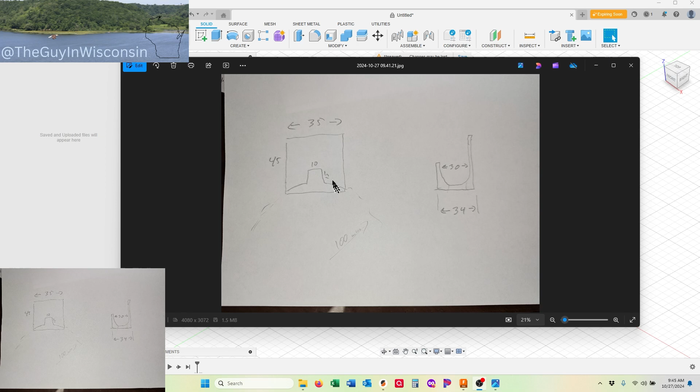This little tab here that's going to stick up and support it, I might have to adjust a little bit because I do have to have the 30 millimeters from the top, in order to accommodate fitting that tube into the area we're going to put it.

So this is going to be a little bit new for me. I'm going to start out by creating an arc that this is going to follow, and then build it up from there. There's going to be a bit of figuring it out on the fly, which I've done on other videos with fair success. So we're going to see what happens. I'm going to have this image down here in the lower left corner for you to follow along, and let's get started.

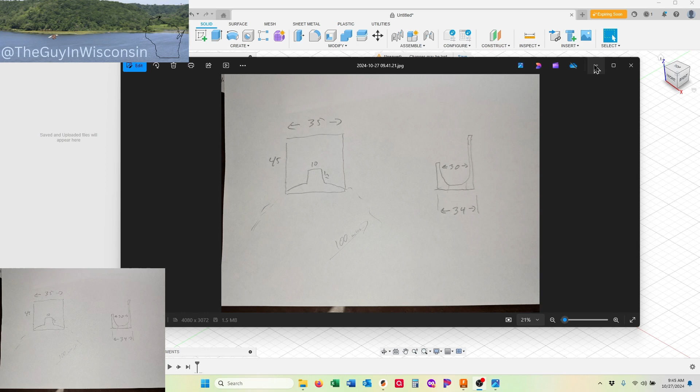So we're going to start out with the drawing. I'm going to do it from the front. I'm going to pop this up. We've got our front side drawing right here.

Now we're going to put a circle to start that initial arc that I was talking about. It's a 100 millimeter radius, so it's going to be a 200 millimeter diameter, which is what this is going to draw out as.

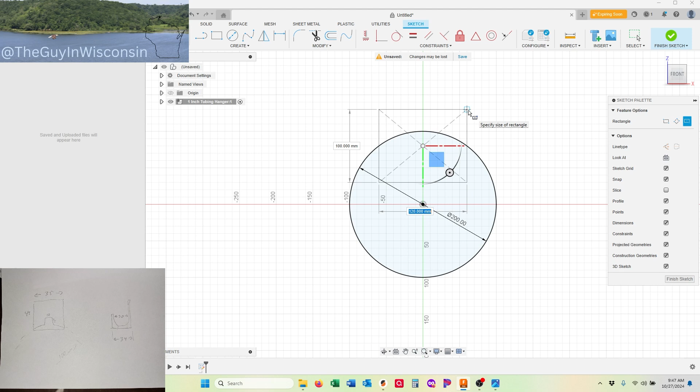Then if we look at the drawing, we see that we want it to be 35 wide by 45 tall, and we want it catching just this top edge here. So I'm just going to roughly place this in here, and I'm going to do a center rectangle so that I stay on my axis point. So we are going to do the width of 35, height of 45.

And to place this, we're going to have to figure it out as we go. So we're going to bring it in here, and we're going to grab a distance from center to this point here. Like I said, we're going to mess around with this a little bit.

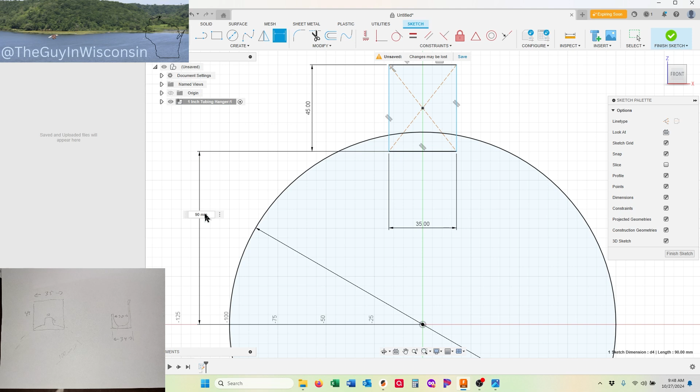So we're going to push it out. We know we want it to be less than 100 because that's the radius. So we're going to start it out at 90, and that's going to get us fairly decent, but that's still going to leave a pretty strong edge there. So we're going to try 95. That's real close to what I want. I'm probably going to have to come back and tweak that again in a little bit.

So that gives us that dimension there. And in order to lock this in here, this is one I struggle with. But we want this to be collinear on this line. So I'm going to add a line in here. It'll be a construction line. It's just going to come up the top here.

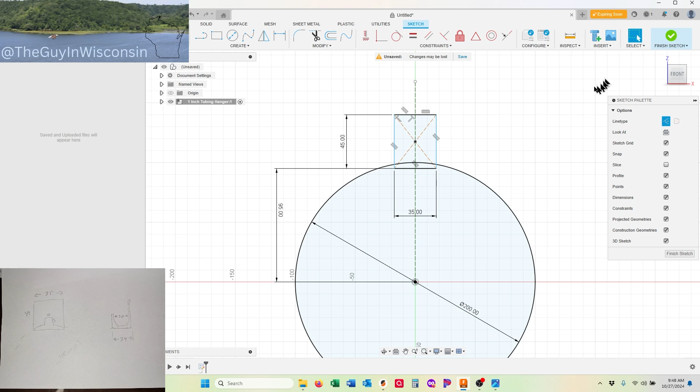And that's all we needed there. Then I should be able to place this dot to be coincident to that line. So I'm going to set this dot to be coincident with that line. And now everything turned black, so we should be good. So it's going to stay centered there for us.

Now, depth-wise, if we look at our drawing, it's going to have a total of a 34 depth, and I want it centered on this plane. So I'm going to extrude this both directions, 17, so we get the total of 34. So we're going to finish this sketch. We'll be coming back to it to make some tweaks.

And I'm going to stretch all this out. We are going to go... oh, it is a distance. And we are going to do symmetric. The extent, the total distance, is going to be measured on one side. We could do total, but we're going to do one side because it's an easy number to figure out.

So we're doing 17. And to get a view of that, we're going to take a look. That's pushing it both directions by 17. So we're going to say okay to that.

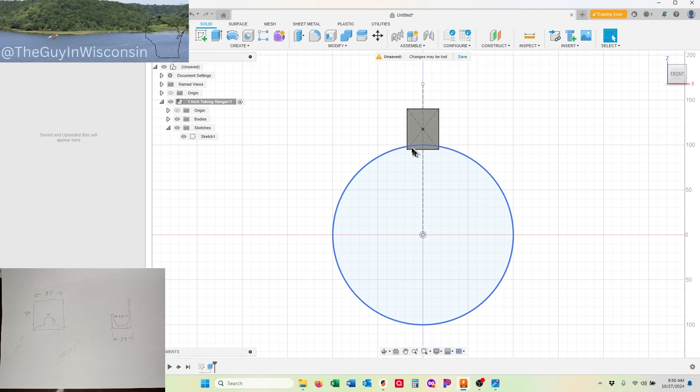Now I've got my first body out there. I'm going to get that drawing back just so we can kind of see how it built it in there, exactly what we wanted it to do. And I can see right now I probably want this space here to be smaller, because remember, I'm going to deal with that overall height.

This will be the bottom part of the circular support, the curved support that's going to be in there. So if I come back to my drawing here, it's going to be pretty easy to switch this out. Now if I just wanted 2 millimeters difference, I'm going to push that up to 97.

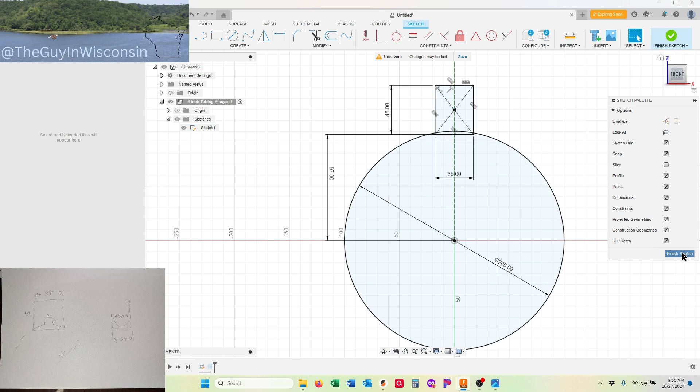Then we can see what that looks like, and I do like the looks of that. If I measure it out, I'm going to come from this point here to that point there. And yeah, that doesn't give me a good drawing point. I'm sorry, it is tough to get these to inspect.

If I pushed it a lot, I'd certainly be able to get through that.

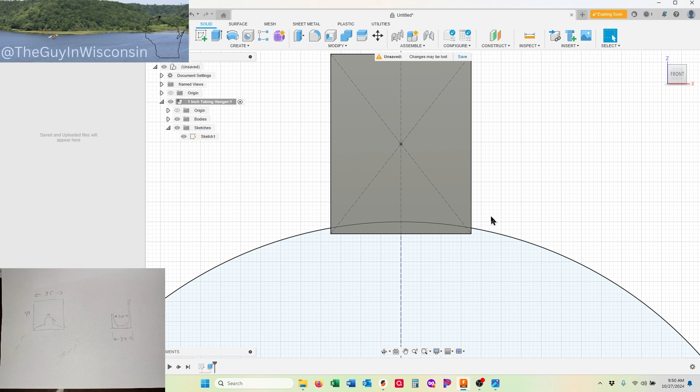All right, so now at this point, what I want to do is work on the center line from the other side, so I can create a profile that's going to allow me to draw or to cut out that circular arc pattern in there.

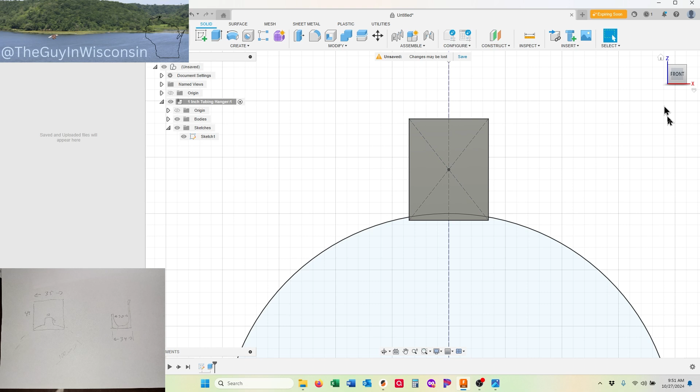So we are going to add, I'm going to get rid of this drawing just to clean it up a little bit. We're going to add a construction plane, and it's going to be at that axis, and we are not going to push it out. We want it to be centered right there, right? And we're going to pull it right through our drawing.

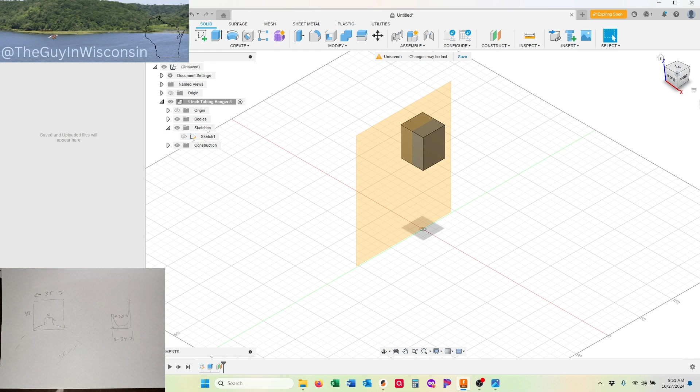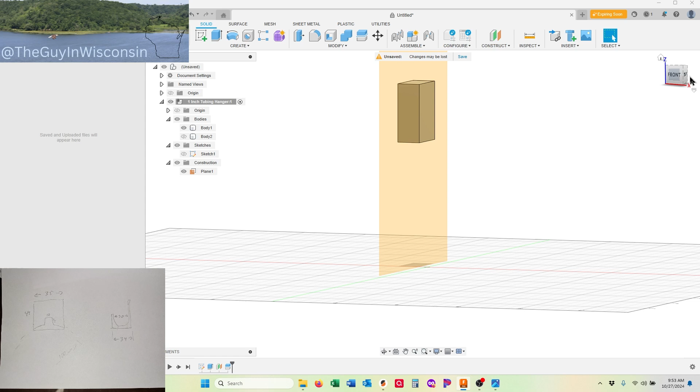And then we're going to split these bodies. We're going to take this body and split it at this plane. And now we've got two bodies here. We're going to get rid of the one on the right just so we can get in here and view it. So now we're going to create that drawing.

It's going to be on the face of this piece here, and now it should let us get away with it. So I'm going to put my circle on here. We want it on that center line. Again, it's going to be the 30.

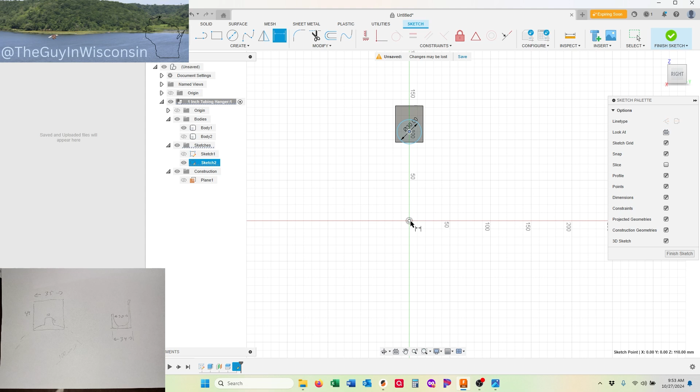And now I should be able to get a distance between these 2 points. Now it'll pop up for me. That's what I was after.

So we know that we are going to be approximately, well, we got the 100 millimeters, and then we wanted it to be half of that 30 millimeter circle, which would be 15. So we want that 115 up. We put that in here.

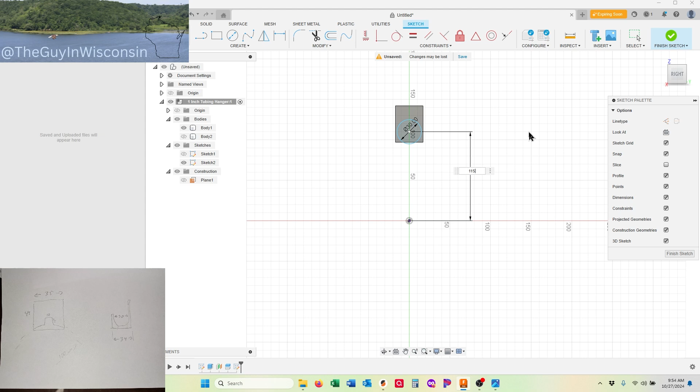And now we've got a circle in here, and we can see how it's going to create the circular pattern. And what we're going to do here is rotate it through both structures.

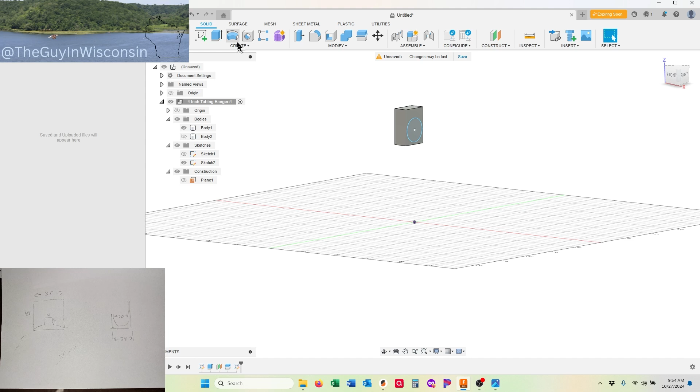So we're going to do a revolve. We're going to revolve this, and the axis is going to be, let's get our origin here, the axis is going to be our y-axis. Oh, come on, Mr. Y-axis, show up for me, please.

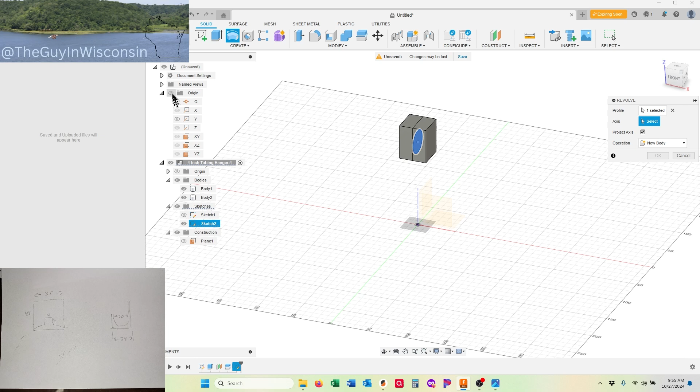And now it knows that we're going to do something with it, so it did a cut. So if we take a peek here, now we've got a circular angled pattern around that radius point that I created.

So now we've got a nice curved feature, and I'm going to be able to rejoin these two halves now. So that's what I'm going to do with this next point, is join the two halves.

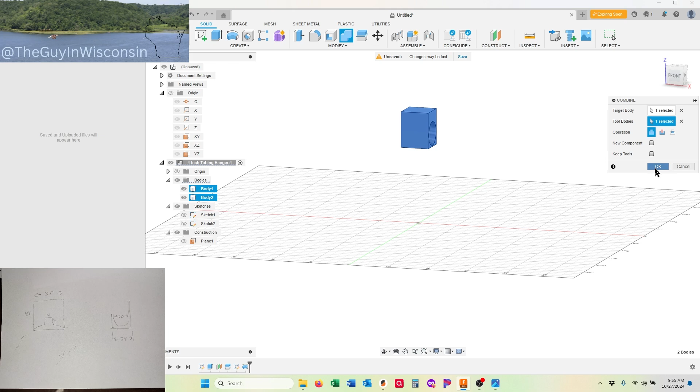So I'm going to combine this body and that body. Now we're back to one body again with that curved opening.

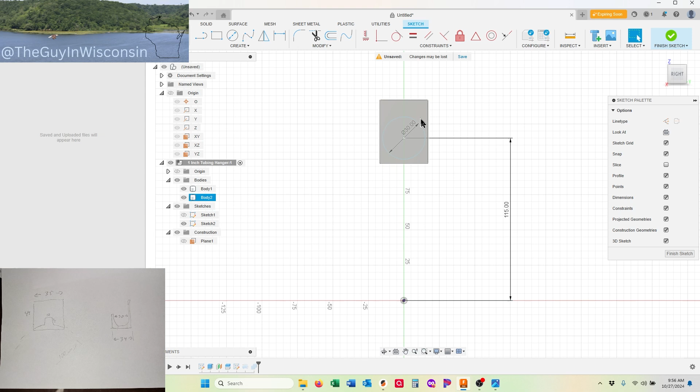We're going to grab, oh, you know what, I want to go back before that revolve and get back into this image here. Grab this. And what I want to do here is create tangents to that circle going straight up. So I have to get rid of one of these bodies so I can get back to my drawing. And put a line straight up here, right up to the top, and another one straight up here, right up to the top.

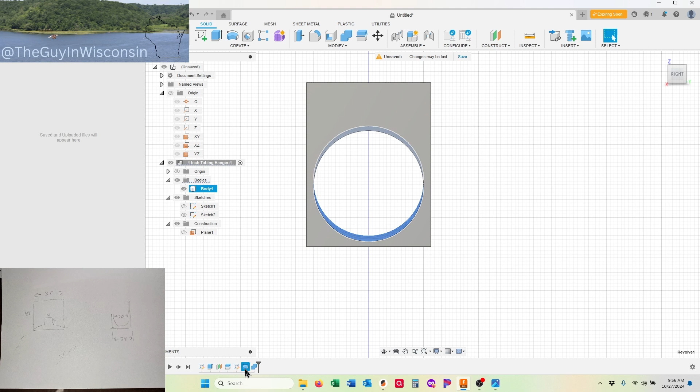And also, I know I don't want to go more than halfway high on this outer edge. So that's going to come out to the side here. And finish that sketch. Now nothing changed because on the revolve I didn't change what's happening on the revolve.

So on the revolve we are going to include this and this in the revolve. So that part's working fine, and I got to get it to accept that I want this portion in there as well.

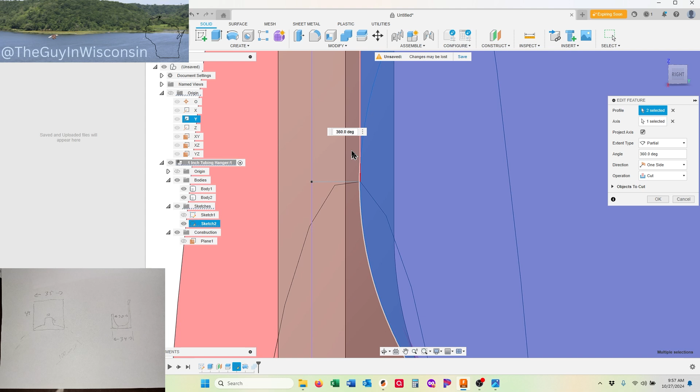Got the same axes, and why is it not allowing me to? I'm going to allow this much. Now as we can see, oh, it didn't go all the way to the top for some reason.

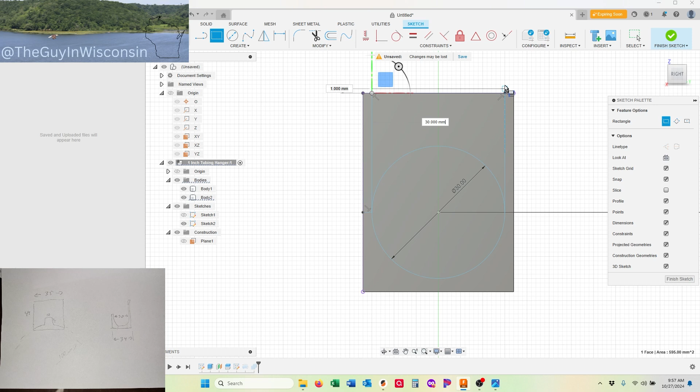Oh, that's because my revolve, I got it. So this is teaching me lessons here. Because this portion only went up this high and it's on an arc, it wasn't going to do the entire thing. So we're going to add a little bit more here just so we can include that.

And that's why it wasn't able to do all of it, because it didn't have a complete body to work with. So now we're going to include this, and I'm going to get rid of the first body so I can include this.

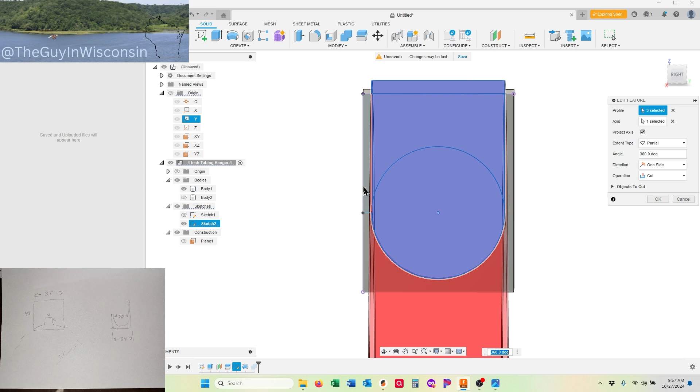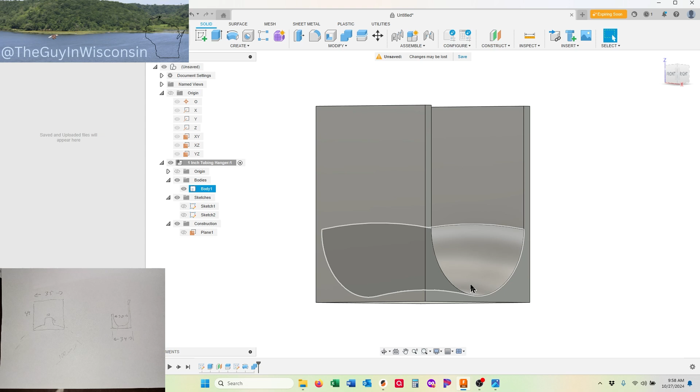Still not letting it, so I'm missing something here why it's not letting me get rid of this part here. But if I go back and take a peek now, we are getting the shape we want. We got the curve here, we can see it show up nice. We got that arc underneath there that's going to support the tubing on the curve, and we got our back piece.

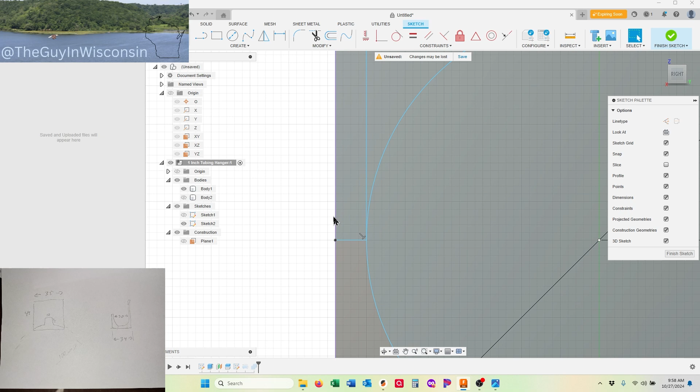If I come back and take a look at my drawing, I must have goofed up something there and not gotten it where it's supposed to be. So I'm going to get rid of the first half of the body again so I can see what my drawing did. Well, this does allow me to select it, so this is an area I should be able to select. It wasn't letting me do that on the revolve, so something with the revolve was saying no, we're not going to do this.

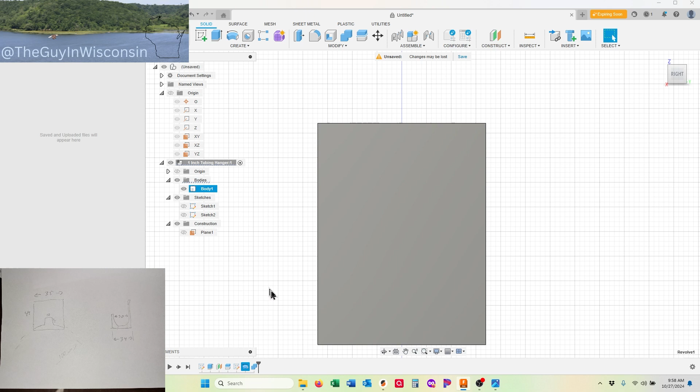I think I can be okay with that if that's going to be the case, but I'm going to try one more time. Now that we know that can show up, I'm going to come back to the revolve and see if I can get it to pull up. Now it lets me do it. It must have just had a glitch - it didn't like what was going on.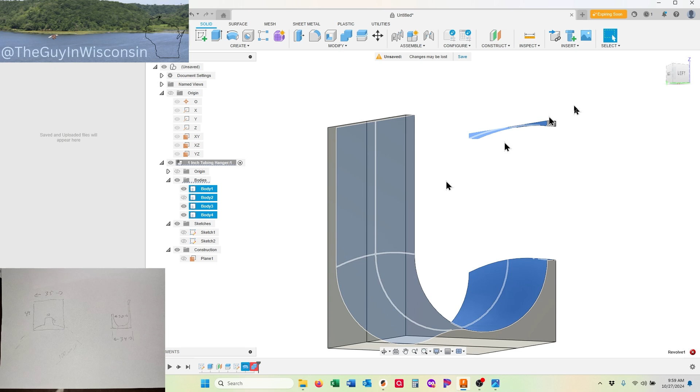So now it's saying it can't combine. We'll have to take a look and see why that is. Oh, because we've got this piece up here. So what I missed there, I'm going to go back and edit this feature. What I did is I didn't put the second body back in the view.

Combine isn't happy, I totally understand that. Come back here to the feature, we're going to say we did that, and we are going to have to... all right, now just like I forgot about the cut feature on the main body, I forgot about it over here too. So I have to grab that additional square there so it's all included in the revolve. That should help us get this squared away.

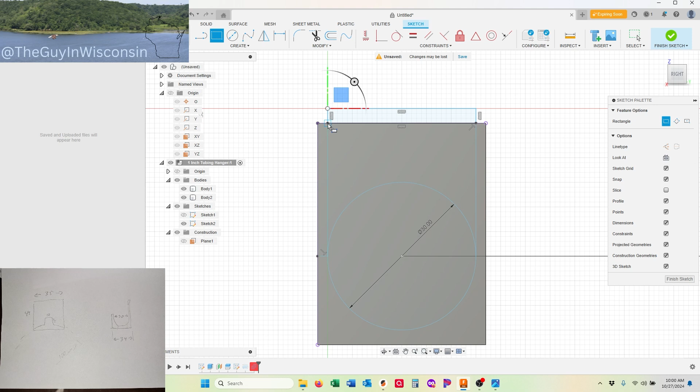So I'm going to add the sketch back out, we're going to move this over. Oh, it's just tried changing my whole picture, which I don't want. So we're just going to do another rectangle right here. Finish that sketch, I'm going to come back over to the revolve feature, and we're going to include this in here as well. And now it should be happy - and now our error went away so I could put it back together.

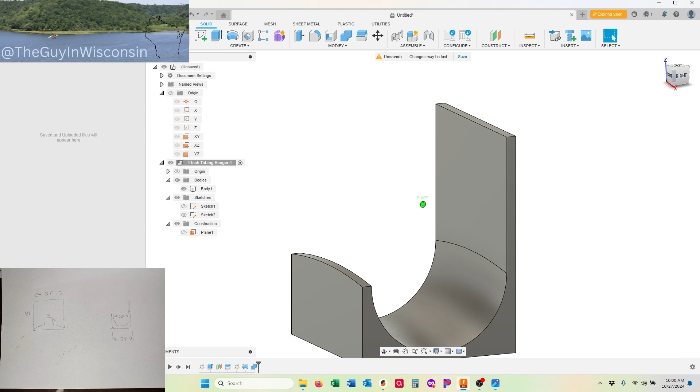So that's really about it. I did have this kind of scheduled in here that I was going to do a pattern, but I think I'm going to change my mind because honestly, I think it's going to work out just fine like this. I do want to know the distance here from the top down, I'm going to see if I can get that to tell me. So if I go from this top edge to this edge right here, 27 millimeters, and I've got a 30 millimeter tube that has to fit into that area, so that's not going to quite work.

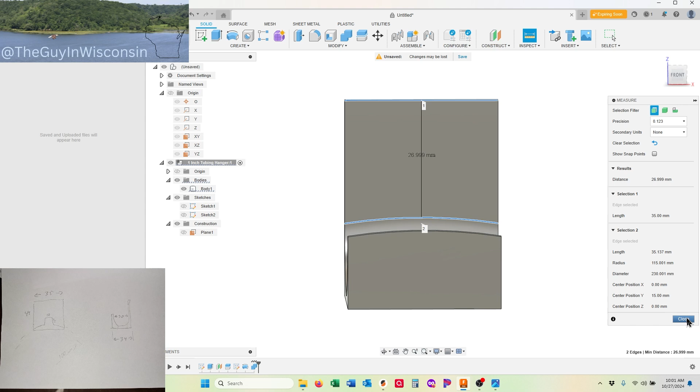So what I think I will do instead is increase the height of this - well, 3 would get me the bare minimum, but I'm going to increase it by about 7. So if I go all the way back to my original drawing and increase this height by 7 and make this 52, the rest of this stuff should work out fine, other than now my drawing is giving me this little gap here. So I'll fix that.

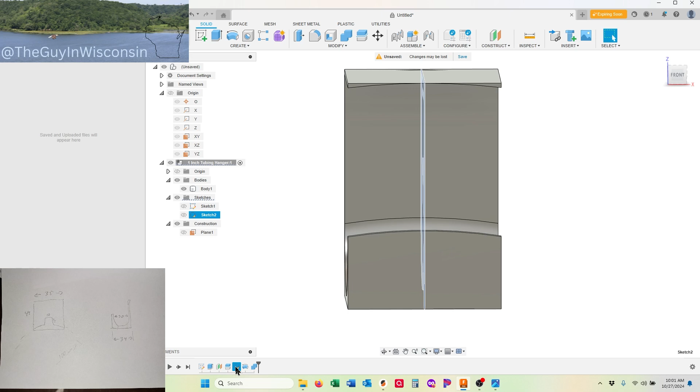Come back into my drawing here - it's just going to be easiest to pop another rectangle from here up to there. And then on my revolve, I'm going to include that. That should take care of everything.

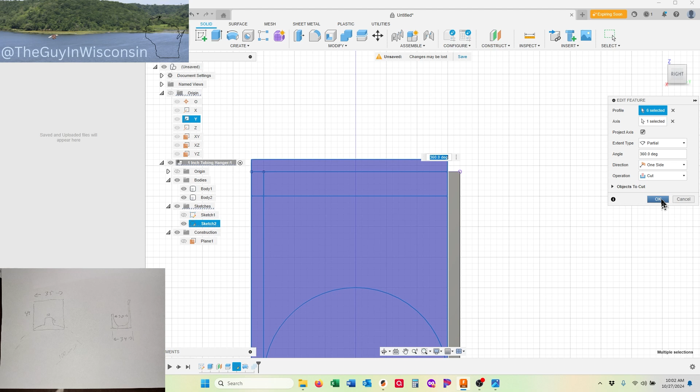Now we're back to what we want to see. If I look at the front again and get a distance from here to here, now we're well over the 30 - and oh, that's because it's going at the angle. So we're going to close that out and do another inspect, going from here to here so it'll be on the same plane. Now we're at 34, that gives me plenty of room for that tubing.

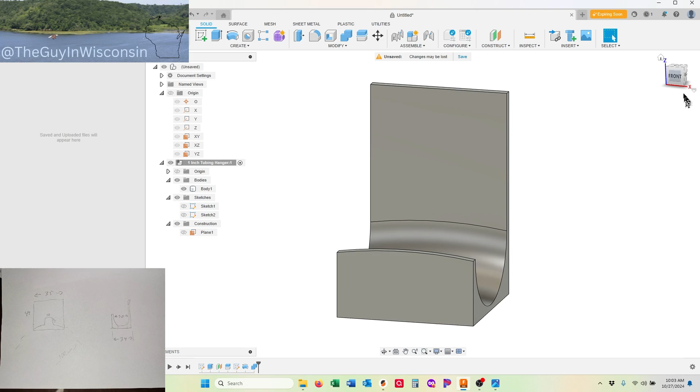That is essentially it. I'm going to round off these edges real quick with some chamfers - fillets, I will always call them chamfers. You probably know that because if you've watched more than one of my videos, I've said it wrong every single time.

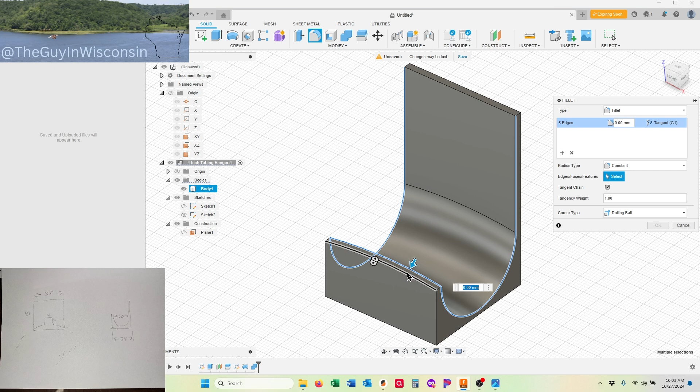Grab those - anything that's going to be exposed that could scratch us a little bit or whatever. It's only going to be a 1 millimeter change, just makes it a little friendlier. Top edge there, do a 1 millimeter - smooths everything out, rounds it all out. And that's it, there we go.